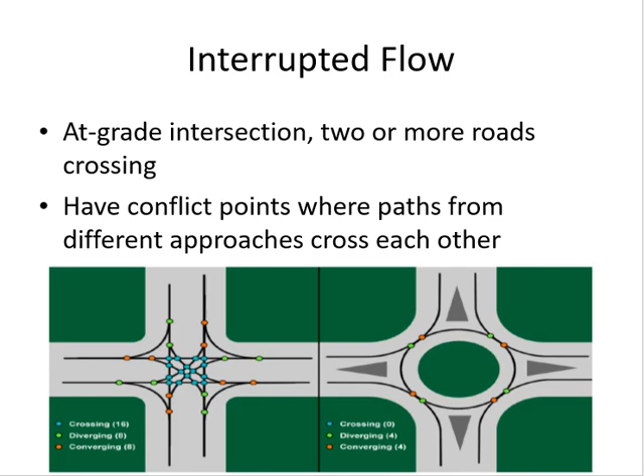There are some slides related to the theoretical part of the chapter. For that, you should see the video already uploaded yesterday. I'll start with the numericals.

Basically, the first one is related to roundabouts, specifically selecting the number of lanes for the roundabout. Roundabouts can have 1 or 2 lanes. More than that is considered confusing and dangerous, so that's why we have this limit, so we can become good drivers.

So this is an example. A city is considering the installation of a modern roundabout for North Main Street and East Third Street. Peak hour volume estimates for the intersection are shown in this table. We have to explore the feasibility of a single lane and a 2-lane roundabout at this location in a planning level analysis and provide thoughts on the design needs for the intersection.

These are the peak hour volumes given for each approach. They have given us how many people are going left and through—through means straight—and how many people are taking the right turn.

This is the total volume of the intersection in the peak hour. Now I need to convert it to AADT.

What is AADT? Average annual daily traffic. We have an approximate—since no other data is given, I will use an approximation. The peak hour volume is around 9 to 12% of the daily traffic, so we can use 10%. So if this is 10% of the daily total, how much is the daily total?

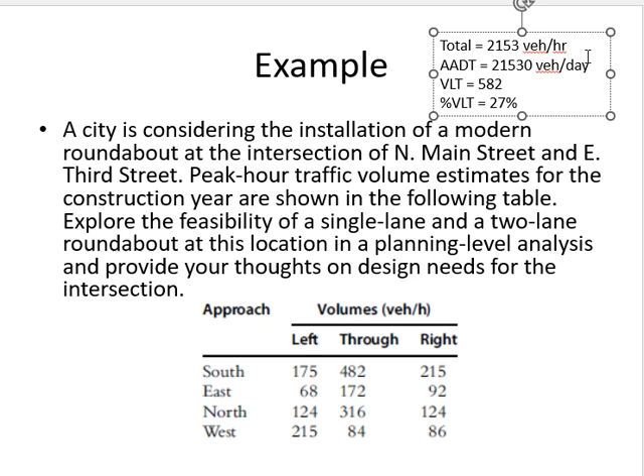So what is the left turning volume? 27%. What was the volume? 582. So the percentage is 27%, out of this total, right?

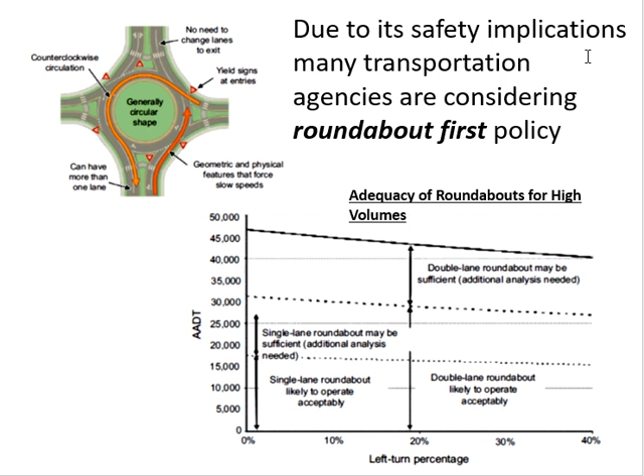Whenever we are dealing with intersections, we have a problem of safety—there can be crashes and conflicts between vehicles. To ensure that they don't happen, we need to check the sight distance. Now, sight distance at an intersection is different from the normal one. Why? Because the normal sight distance is forward—how much you can see on the road in front of you. But sight distance for the intersection is not forward; it's about how much you can see on the other side—from how far you will be able to see the vehicle coming from the other direction.

This is how you will decide whether I should stop or slow down or go fast. Clear? So this is why it is different.

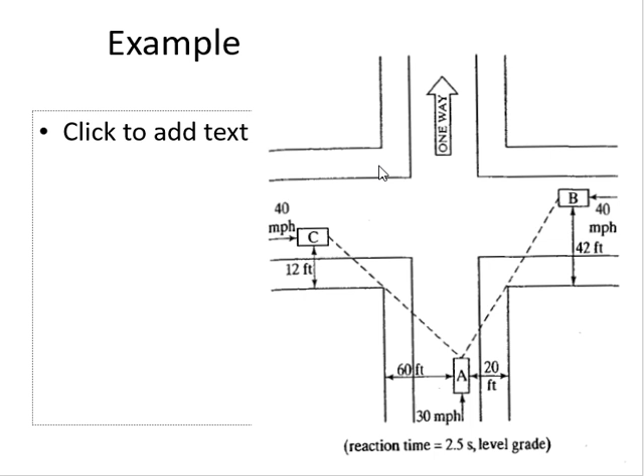So we need to check the sight distance conditions for this guy from both directions, as well as the other direction. So first, using the speeds, we will calculate the sight distances required by them. The sight distance equation is this one. Or let's just calculate for A -- give me the sight distance for A.

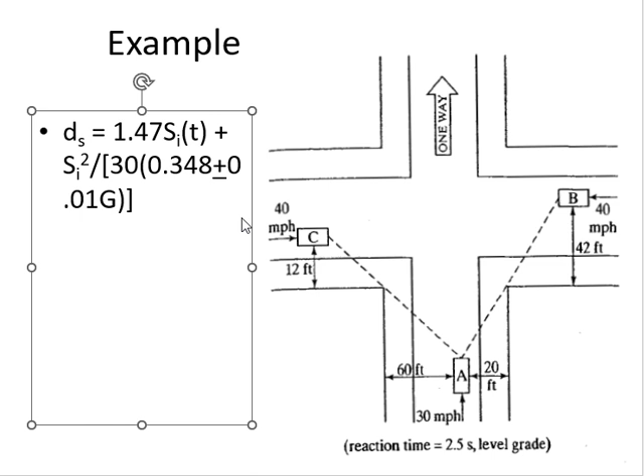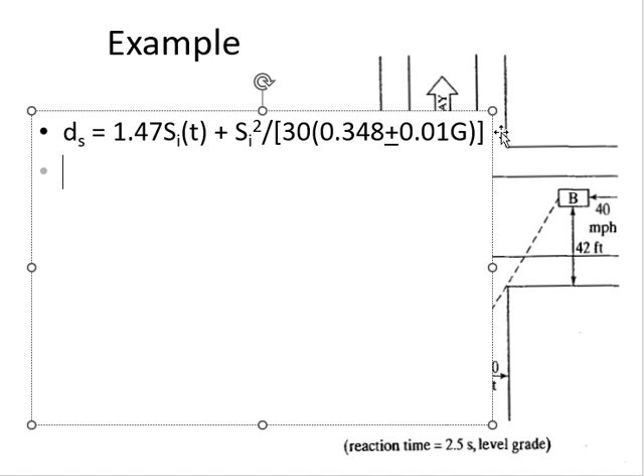T is how much? T is 2.5 seconds. There is no gradient given, so we will assume it to be 0. It's level ground, so gradient is 0. Speed is 30 miles per hour.

Now we'll calculate the minimum dB according to both cases: the first case using similar triangles, and the second using the empirical approach. So in the first case, dB actual equals to this.

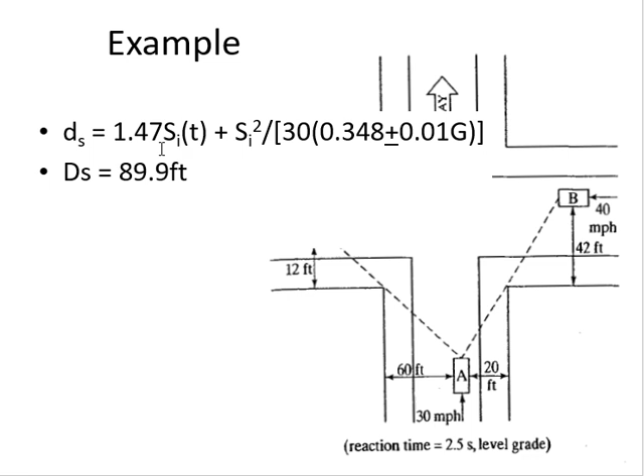So what will be my dA? Tell me, what is my dA? dA is the sight distance which is required by vehicle A. So you will put this as dA. A and B are the distances to the obstructions which are given here. So this one is A, and this one will be B. So how much is dB actual?

What? Okay, any question, any problem?

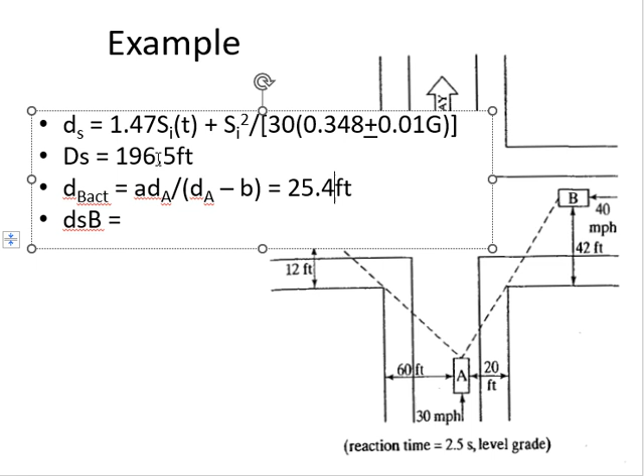Okay, this is the actual distance available to this guy to stop. How much is the minimum required to stop?

Calculate the sight distance for the B vehicle now. For this vehicle, the speed will change.

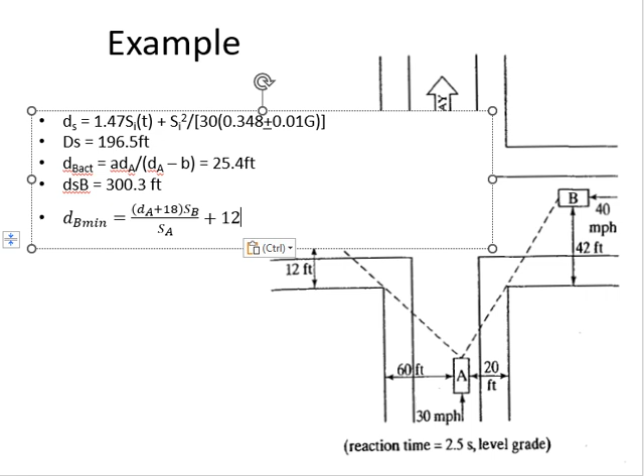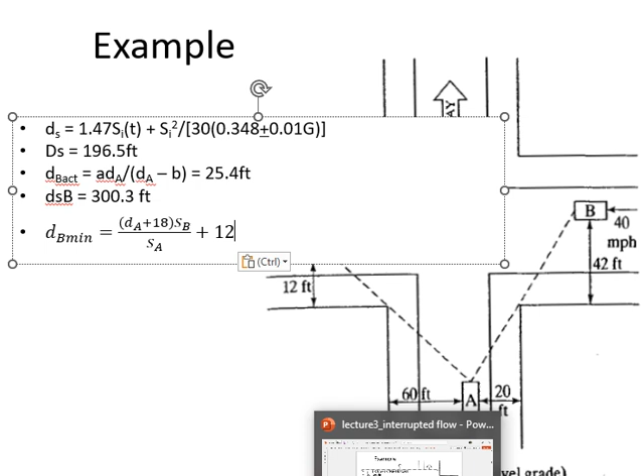SA and SB are the speeds. We already had the conversion factors in the actual equation, no need to convert it again. 298.

Even according to them, the minimum required is more, and the actual is less. So in both cases we won't have enough.

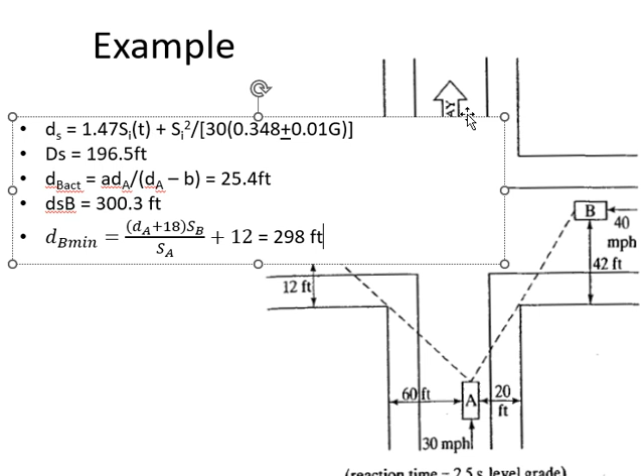For the other side, this will not change, it will remain dA. So when we are calculating dB actual, dA will remain the same. A will be on this side now, so small a is 60, and small b will be for this vehicle, which is 12.

So for the other side, what is my dB actual? dA is the same, dA is the same. A and B will change.

DC actual, no problem, we are putting it as dB in the equation. How much is that? 63?

Okay, so this is actual, then minimum. This one has 40 miles per hour speed, same speed. So the minimum according to sight distance standard will be the same, and your actual is less than the minimum.

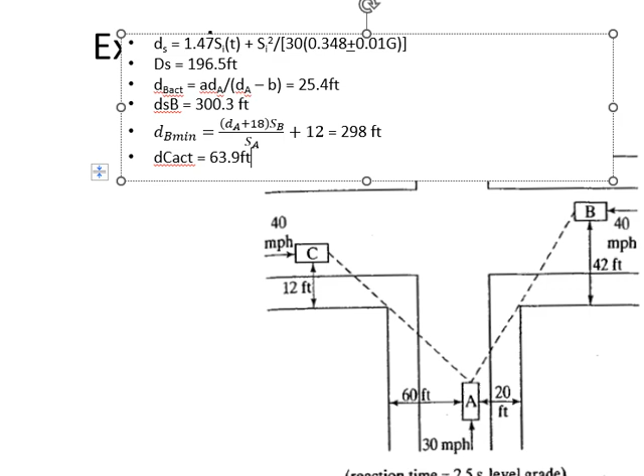Okay, any question? Okay.

Now this example gives you an idea about warrants. What is a warrant? A warrant is a condition in which a specific control device is required, or becomes required, for the intersection, like we saw in the previous case. Now you cannot leave that intersection without a control device, because drivers do not have enough sight distance.

He mentioned three things: put a stop sign, put a signal, put a bridge, and so on and so forth. So which control device should we use? So then we have to look at other things as well. In the Manual on Uniform Traffic Control Devices, there is a manual that lists down these conditions for each type of control device.

For example, these are the warrants for putting a stop or yield sign. Yield meaning give way. So according to them, you can put a stop or yield sign if one or more of these things happen. If you satisfy any one of them, it's enough to put a stop or a yield sign. What are these conditions?

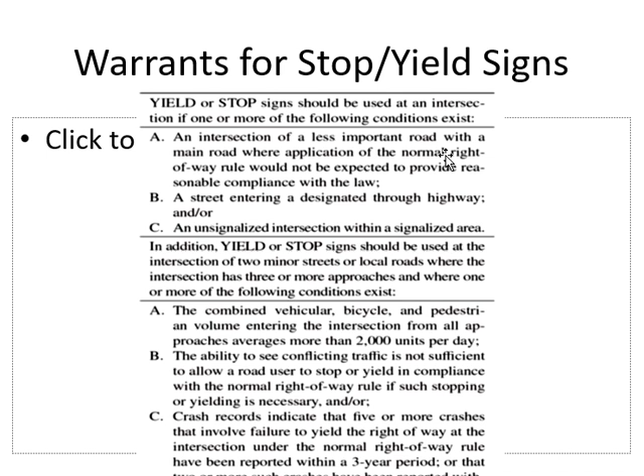Okay, there's a limit of crashes for signals as well. There's a limit of crashes for 2-way stop sign as well. So you will see this condition very often, and this one as well. This one is about the sight distance, and this one is about the crashes. So you will see it happening or coming up again and again.

This is for 2-way stop sign. So 2-way means stop sign here and the other side. Both directions will have stop sign, for the same road, both directions the same road, having the stop sign.

A stop sign should not be used at any intersection which already has a traffic signal, because it will conflict. Signal is green and there's a stop sign, it will conflict. So at no approach of the intersection which has a signal should the stop sign be used. Secondly, a stop sign should not be used for speed control. The drivers are coming too fast, and because of the speed the accidents are happening, like I mentioned, vehicles going out of control. So let us put a stop sign, because then the drivers will slow down - no, a stop sign is only when the crashes are happening, when you need it for the intersection, not to control the speed. So in these cases, you don't use a stop sign: signal, and for speed control.

Okay, where can we use a 2-way stop sign? So the first condition is that you have already used a give way sign, or a stop sign on one side, and you think that it's not working. So if you have a major road and a minor road, a major road crossing a minor road, where will you use the stop sign? On the minor road. Okay, so these conditions are for them.